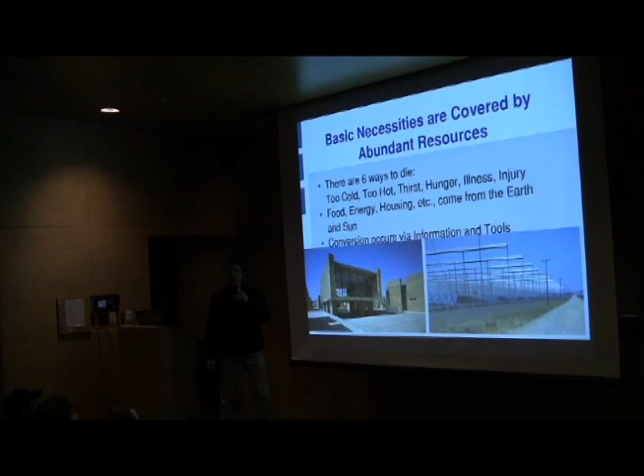So to provide our quality of life, we have to start with the needs that we have and the transformation of resources to meet those needs. And it starts with energy.

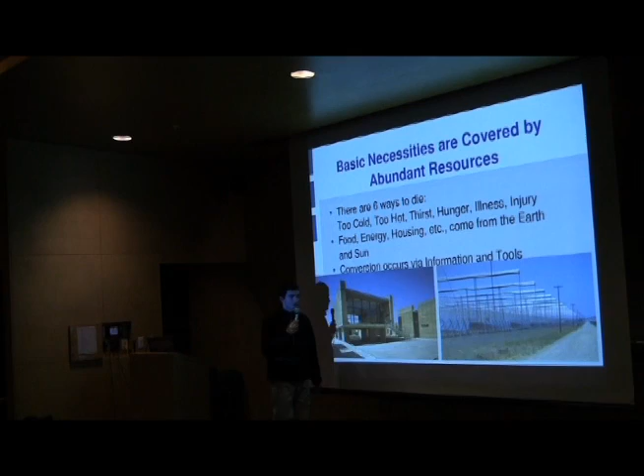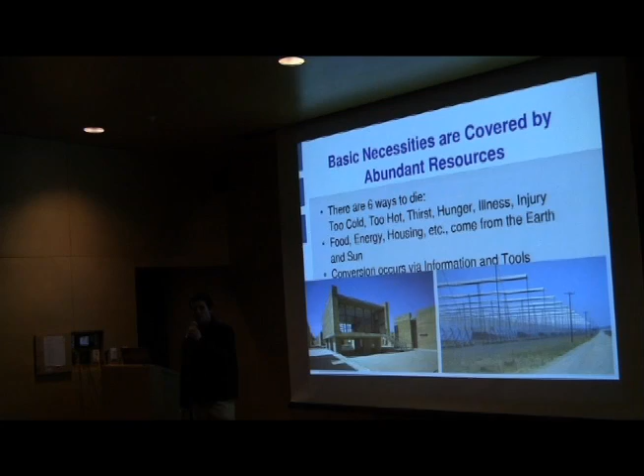Here I'm showing solar concentrator electric technology, which is a feasible technology. Power plants like this are coming up in the Southwest, and actually in Spain and other places. So what you see here is mirrors reflecting solar energy onto linear concentrators, linear receivers. You're boiling water, generating steam, spinning turbines, and generating electricity.

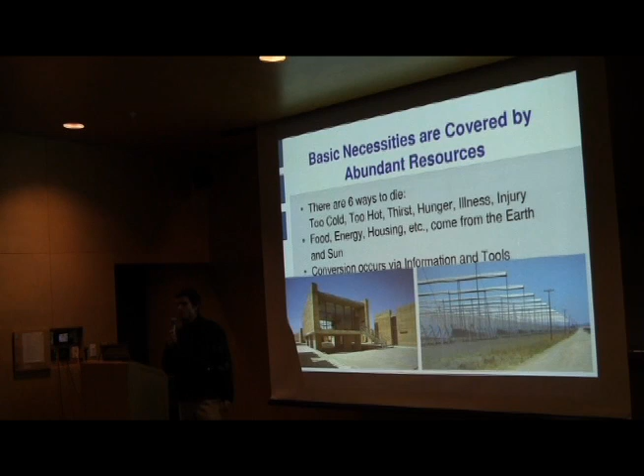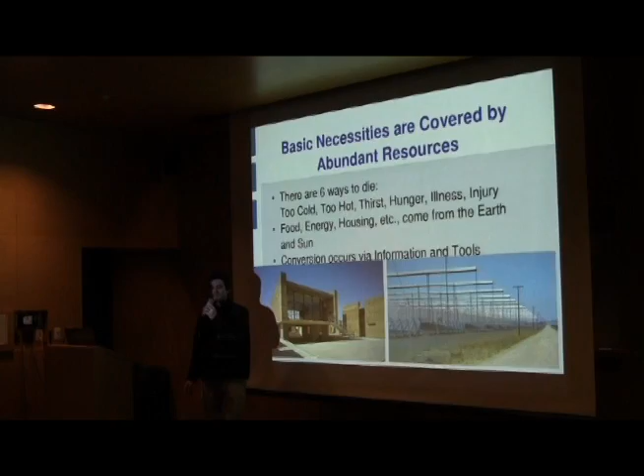So with this example, let's ask this: how much area would it take to power all of the US energy needs using this existing technology? What's the answer? The answer is 0.2% of the land cover of the United States. So in principle, we've got abundant energy.

So now we take the concept of open sourcing technologies, which is what we do for a living. One of the byproducts of open sourcing—meaning collaboratively developing and publishing plans for all kinds of different things—is open source economic development. It's based on the Linux open source computing model. We're extending that into the production of real physical goods.

The typical cost reduction when you open source something is that it becomes much cheaper, much less expensive—a factor of 8 is typically observed. So what would happen if a technology like this were 8 times cheaper?

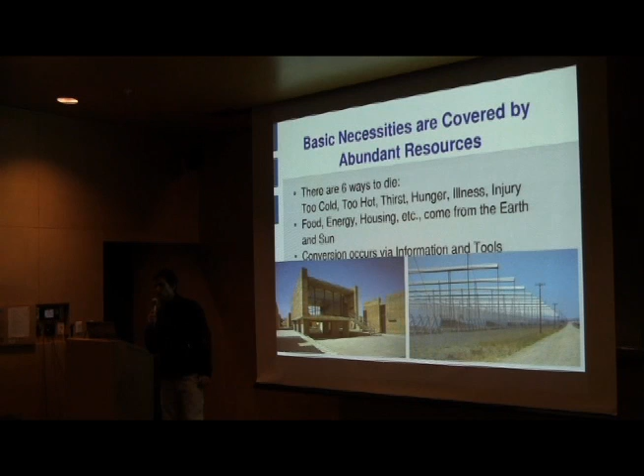Well, then you can possibly guess that this technology would be feasible just about anywhere in the world. If it's 1,000 watts a square meter in a desert, you might get like 500 watts a square meter here, or in northern Maine, or somewhere like that. So in principle, this could be a technology that's feasible anywhere, and also on a home scale.

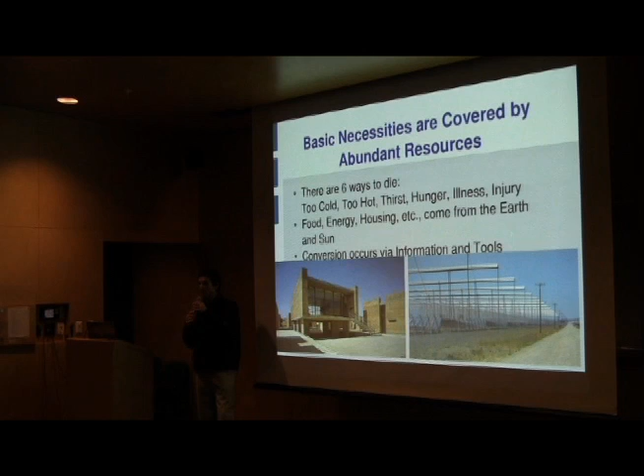So what does energy allow you to do? It allows you to process various natural feedstocks into the substance of modern civilization. Take ubiquitous clay—you can smelt aluminum from it, since clay is aluminum silicate. Or take ubiquitous sand, silicon dioxide—you can refine it to silicon, which is the digital age.

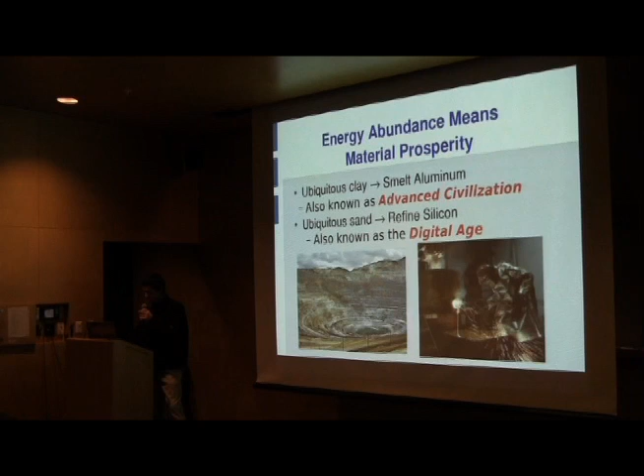The concept here is this kind of technology would cost you like $10,000 to $15,000 a few years ago, before this open source project came about. After this came about, you can download the plans for this device and build it for $400 in parts. So that's an example of pretty amazing cost reduction that's feasible with open source development.

So here's the Global Village Construction Set, also known as the Resilient Community Construction Set, depending on which audience we use, but we're sticking with Global Village Construction Set these days. That's a good name. Before I go into all that it includes, let's look at a little video to show what kind of work we're doing on the ground.

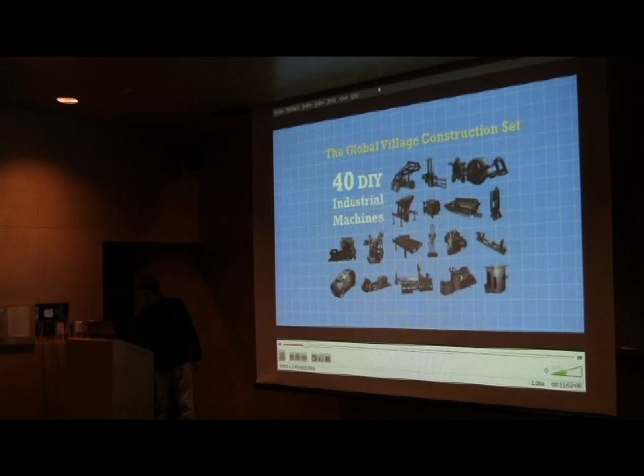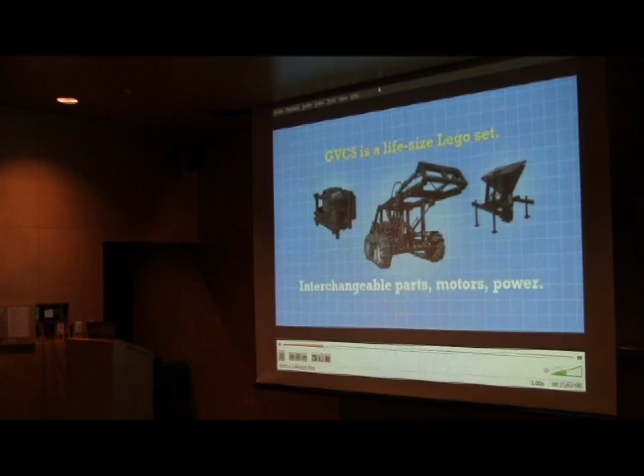Open Source Ecology is a network of farmers, engineers, and supporters that for the last 2 years have been building the Global Village Construction Set, a set of 40 different machines that it takes to create a small civilization with modern-day comforts. The Global Village Construction Set is like a life-size Lego set in which motors, parts, and power units can interchange. Thus far, we have prototyped 8 of the 40 machines and have published all of the 3D designs, schematics, instructional videos, and budgets on our wiki. The cost of making or buying our machines are, on average, 8 times cheaper than buying from an industrial manufacturer.

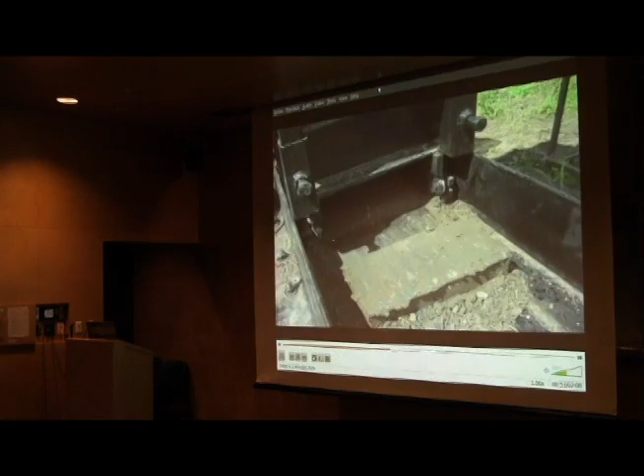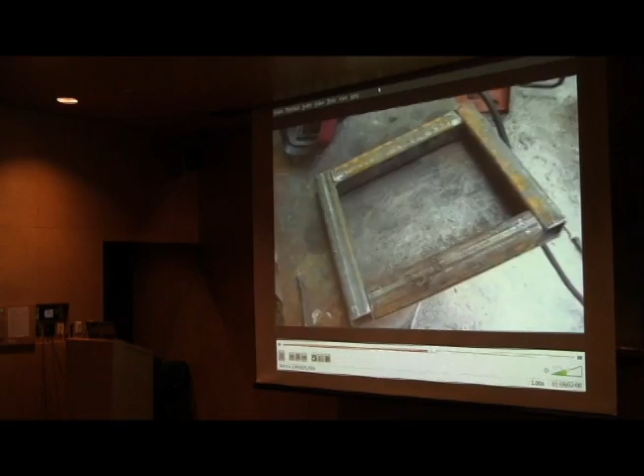The compressed earth brick press is our first product release and is the world's first high-performance open-source model. This machine allows one operator to load raw dirt right from the building site. The MicroTrac walk-behind tractor is a perfect solution for small-scale agricultural uses or where land features require a more flexible tool than a full-size tractor. The front mount allows attachments for tilling, mowing, and chipping.

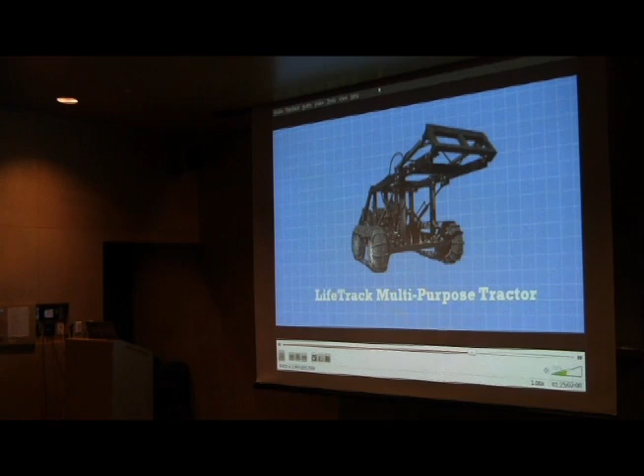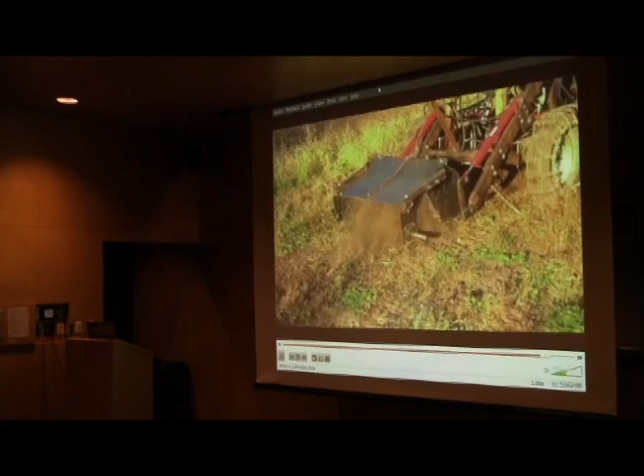The LifeTrac multi-purpose tractor is the backbone of the Global Village Construction Set. The LifeTrac combines the power of a skid loader with the functionality of an agricultural or construction tractor. This year, we also completed prototypes for our drill press, self-replicating torch table, string trimmer, and soil pulverizer. As you can see, we've got a lot more to do.

Okay, that's a picture of the work on the ground. We've done some interesting work already. So to get back to the presentation, okay, let's go back to this one.

Okay, so what you've seen is a life-size Lego set for constructing real hardware, like the whole infrastructure—tractors where parts interchange. You can interchange the power units between things like the tractor, the car, the bulldozer, and tools like a drill press or lathe and stuff like that.

The motors can also interchange, so it's just hyper-modularity, radical hyper-modularity in design, lifetime design, where bolt-together construction allows you to totally maintain it. We're designing it in the absolutely simplest way possible so that the human is totally in control of their technical equipment base.

So we've got the whole agricultural and construction infrastructure: things like cars, tractors, combines, haying equipment, solar concentrators, electric power, modern steam engines, pelletized biomass for fuel, means of fabrication, and other things like bakery, dairy, nursery, and some other essential items for a community.

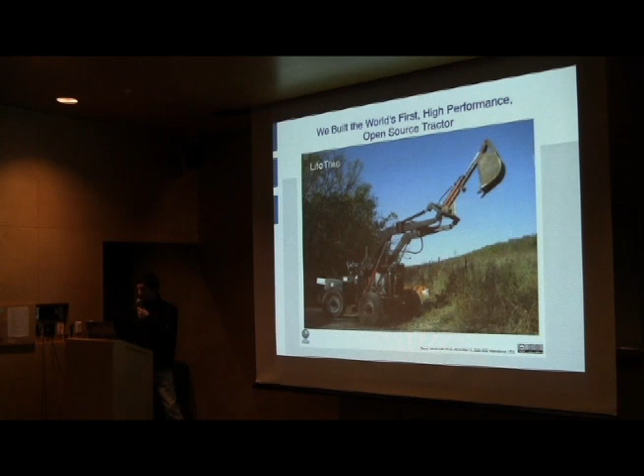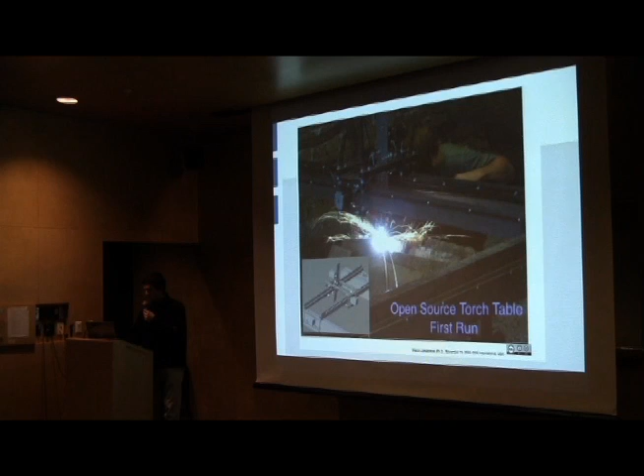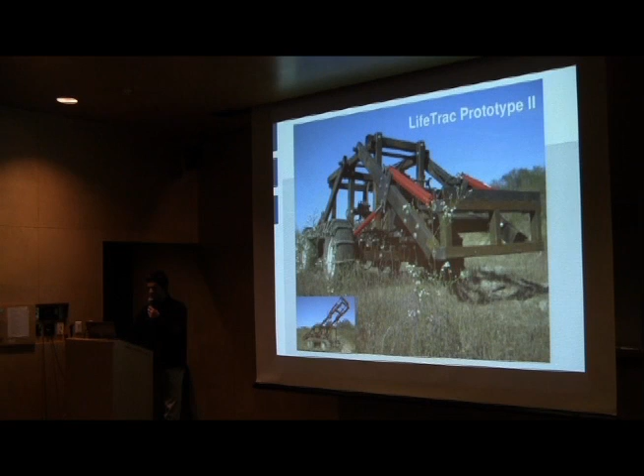This is the second prototype of the tractor. You can see the very basic design—it's like a box with wheels, and the power unit goes on top of that. We added tracks to that for extreme traction. And this is the soil pulverizer, for pulverizing soil for compressed earth brick press construction.

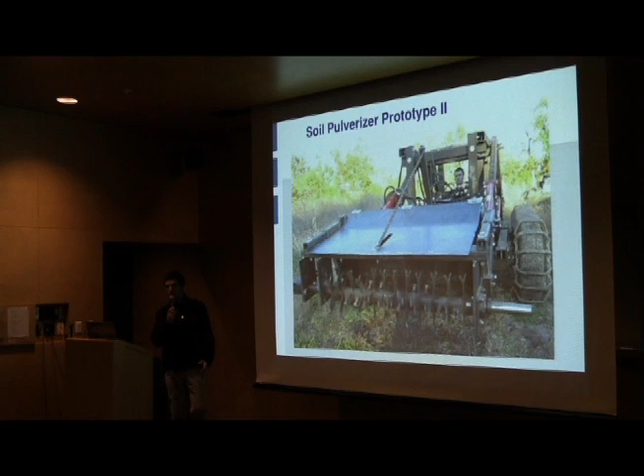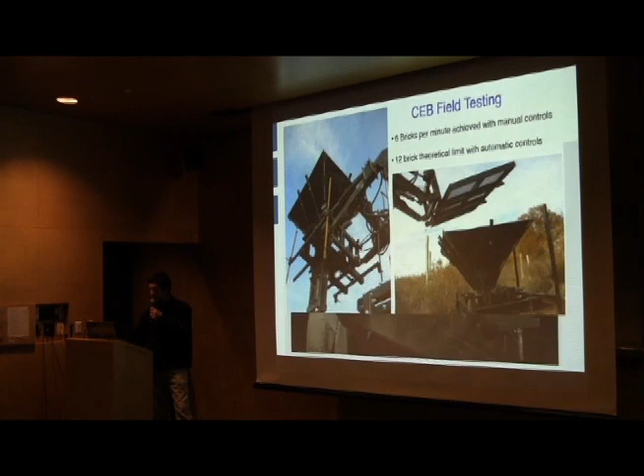So it's about creating very efficient tools of production in a set. This was the second prototype of the compressed earth brick press, the full product release. The concept here is it's a fully automatic machine, and just one operator with a tractor and a soil pulverizer can load this, and that's enough to press bricks, which slide out the other side of the machine.

The machine also has an electronic controller that builds on other open source projects, so you can take a look at those plans. It's all documented, and in principle somebody with basic skills could end up putting one of these together.

Right now it's taking us about a week to produce these things, and they're largely designed for disassembly, like bolt-together construction, so you can crate it up if you want to ship it. This thing stands about 7 feet tall, but you can compress it into like a 3x3 by 6 foot box for shipping.

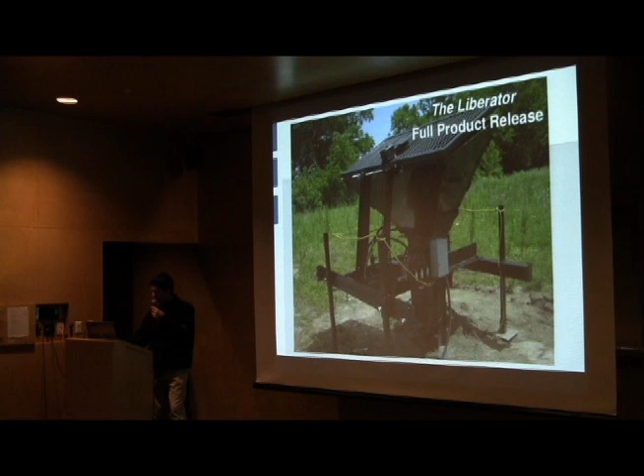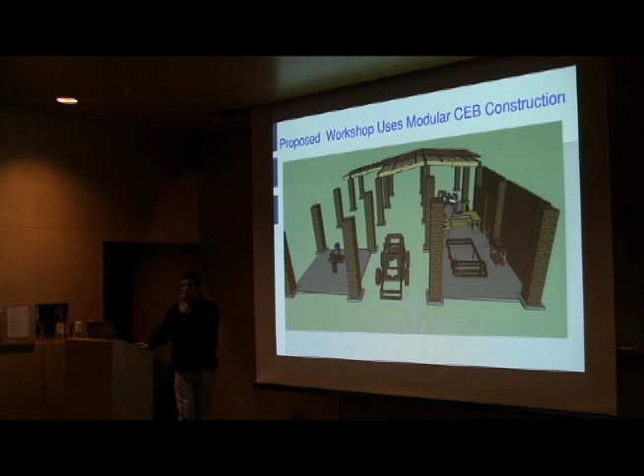This is the kind of structures we're beginning to build, modular CEB construction, where you start with the columns and you can infill any kind of wall you like, either single wall or double wall with insulation, like hammer-milled straw for insulation or something like that. You can also make things like housing with the same construction system, so we're experimenting with this novel way to build modularly with masonry, the bricks that we're making.

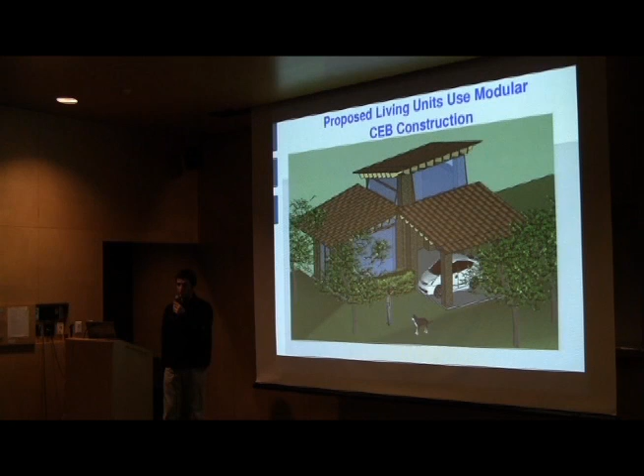Here's another important point, that the open business models are actually working. What we do is share the plans not only for the machine, but how we produce it, so that other people can replicate this enterprise.

On the compressed earth brick press, the material costs are actually about $3,000. We're selling the machine for $8,000, and the competitor with the closest machine would charge you $45,000. So there's an amazing efficiency in our ability to produce by eliminating all the types of waste that go into product development, like proprietary development costs and a lot of other forms of waste.

And then RepRap, that open source printer I mentioned, has shown amazing forms of cost reduction as well. So we can be talking about potentially post-scarcity levels of production.

The concept is that we're now taking ubiquitous resources that are all around us, and by building the technology set we have available on a local community scale, we can meet real needs with, for example, construction materials right from the building site, like this compressed earth home here. It's an example of the kinds of things you can now build if you have the technology to do so.

The Global Village Construction Set includes just about all the tools we have for building resilient communities, from agriculture to fabrication, energy, housing, and so forth. And if this thing works, it could spread virally.

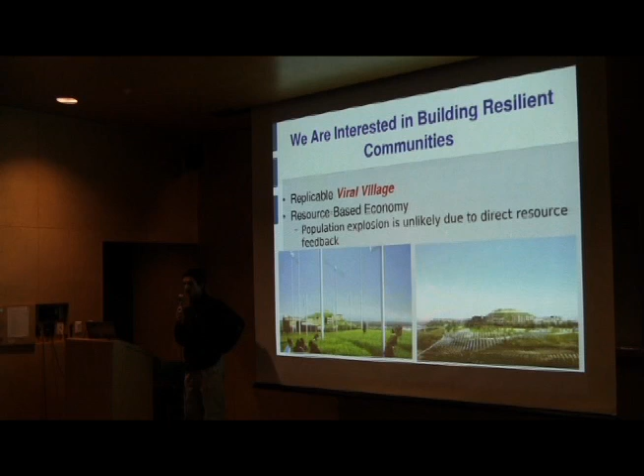Another side effect here is if your community is using its own resources from the immediate environment, there's a natural feedback that will check populations of people, i.e. if you're crushing your environment, you're not going to overpopulate because you see that immediately around you, as opposed to all the things that come from global sources where you have no idea when is enough, or if there's any shortage of something. You don't know that. So by using resources locally, you can have much better control on the population explosion issue as well.

We're not calling for any doomsday scenarios here. We're talking about doing things better with things like lifetime design, which gives you a 10-fold factor of efficiency right there when some object does not break after 5 or 10 years but lasts 100 years. That's a big impact right there.

We talk about neo-subsistence as a concept where you can produce for outside markets if you like to, but if you can produce for your own community, you don't have to. There's no longer that pressure to get into trade or to work for the man, or cause war, because you can actually fend for yourself. So this is a way to take care of your neighbor if you're able to provide for yourself.

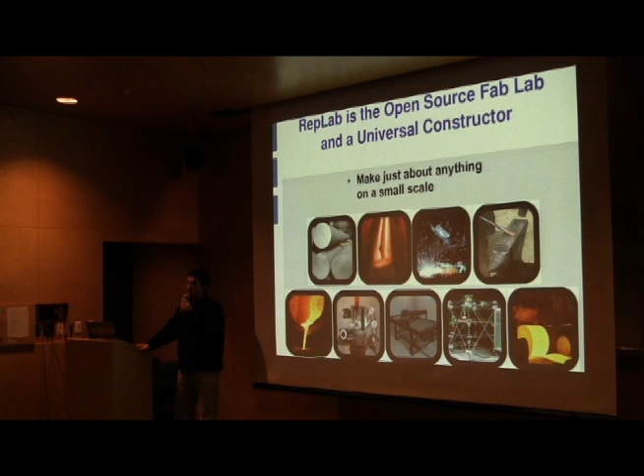It's the Fab Lab concept you might have heard about, that originated at MIT. But let's open source all those tools and enable local communities to produce locally. The model being that in the flexible fabrication scenario, you've got people who can generate designs globally. Everybody can create designs like the CEB press, the tractor, or whatever else. You can share that globally and then produce locally in your community. So that's the vision of distributed manufacturing that's feasible in today's world.

But this is not about technology. It's really about humans becoming more integrated, aligned with their true values, reconnecting to ourselves, to nature. And we say that technology should in fact be a way to reconnect to nature. If you're using your local resources to feed you by the use of technology, then you care for your local environment and you drive to make it better, not to destroy it, in a global system where the accountability is not there because of scale and all kinds of global flows. So we can take care of nature and have technology be a part of that.

That's that. Okay, but we're about halfway done. I want to tell you a little bit about another story about lifestyle issues surrounding this. So here, let's go to... okay, here's the next deal.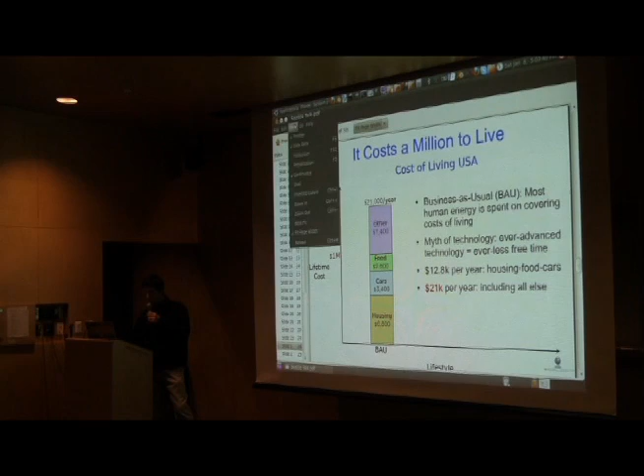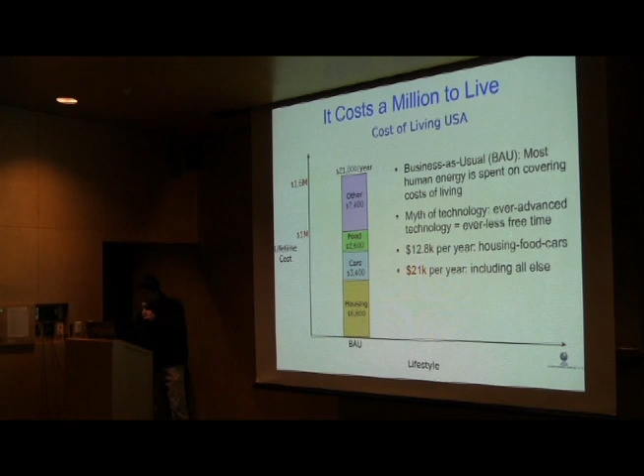Did you know it costs about $1 million to live, just to provide your housing, cars, food, your transportation, your wheels, over a 78-year average lifetime? That's what it ends up costing. Can we do better? Okay, that's business as usual. What about this? What if you were to invest in an entire infrastructure that can get you all the things that you need? How about if you spend, like right there, that's not a mistake, it's like 0.02 million, like $20,000. How do you do that?

Let's say you got 10 people at 20K each, you get together, say $200,000, and build in the entire infrastructure, starting from land, and all the productive equipment that can get you to do that. The whole point being that if this thing is providing full resilience, meaning all the needs that you have, then your cost of living goes drastically down if you value your freedom as opposed to having to work for the man.

Okay, so what if we tried to do this in the mainstream industrial economy right now? Well, first you'd pay more. If you didn't have the open source tools, which you could build, and went to the store, to Northern Tool or your industrial provider, it'll cost you like $900,000 to build the same thing. That's not too bad, but the problem is that with proprietary closed source equipment, these things break down, and maintenance costs in the long run end up killing your operation. It becomes literally impossible to keep up with the costs of maintenance. You need expensive repairmen, expensive parts, and so forth if you don't have control of this technology.

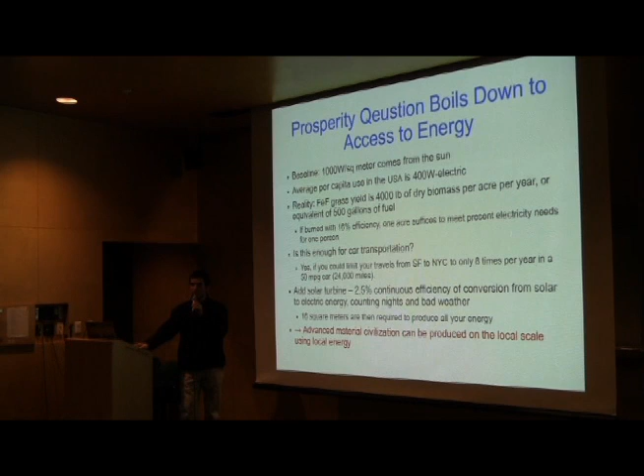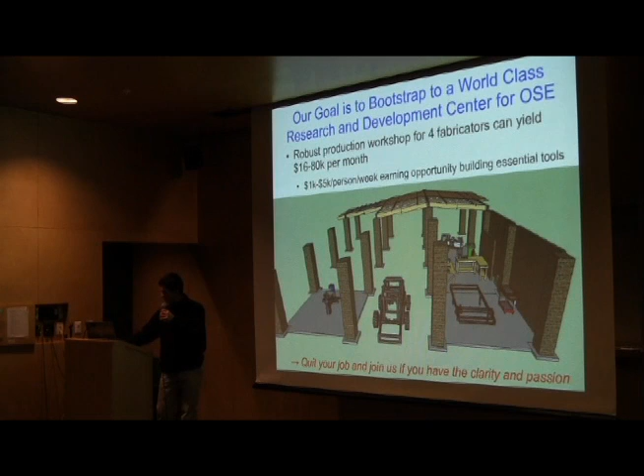So we're trying to bootstrap the revolution here through product sales. And also we're trying to build up our infrastructure for housing, to house people for dedicated project visits and collaborators on site at our place.

So to summarize, we've shown this interesting Lego-like construction set for building the infrastructures of communities. We're showing that the economics of this are actually working out, and that replication can happen at very low cost.

So where we are right now is, after 4 years at Factor e Farm, we're basically regrouping and reorganizing for rapid parallel development. We've gotten just one full product release. We've got a ways to go. And we're looking to gather, through the nonprofit sector right now, like $2.4 million over the next 2 years to finish the entire set of the 49 remaining items within 2 years.

So we're talking very quickly in rapid parallel development style, where we tap project managers, subject matter experts, prototypers, designers, and fund them and pay them to do the development work and go from there.